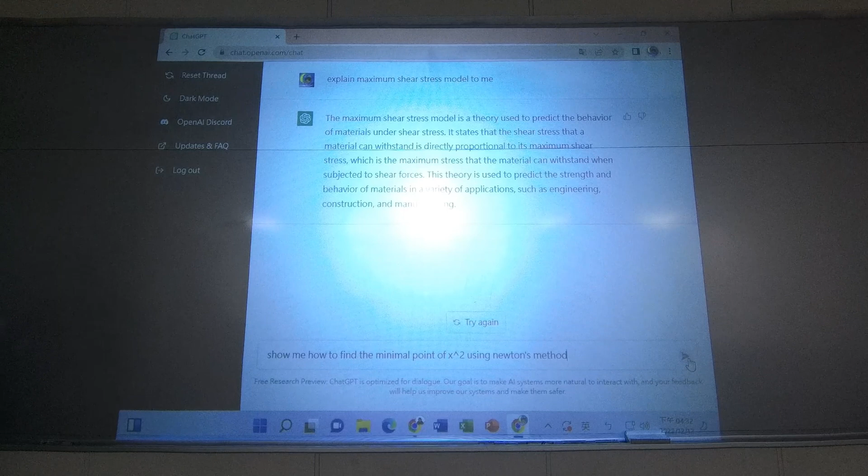You can even ask it to solve a math problem, like finding the minimum point of a function using Newton's method, and it will tell you how to do it. So from now on, you don't need me—you can just ask AI, and it will teach you how.

It's really doing a pretty good job. I'm very surprised by this. But because it's free, the answer can only have a certain length—there's a limitation. So when the AI finds a longer solution, if it's over the limit, it will stop at some point. But you can ask the system the same question multiple times, and it will search the internet for answers again, giving you a different answer.

So it's quite powerful. This time it's showing me an example—last time I tried, it didn't show an example. Okay, remember last time we had, in gear design, a model called the Lewis factor. Let's see if AI knows it.

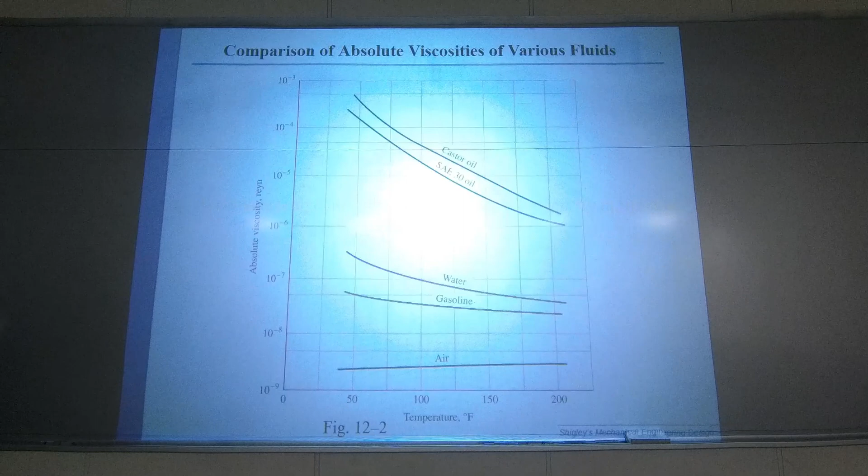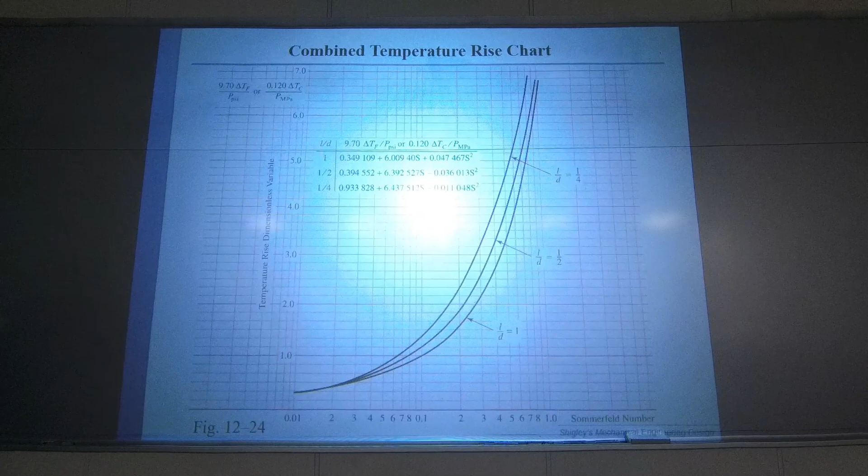So inside the bearing, for example, if we have a ball bearing, we have small metal balls inside. Let me show you a picture. This one—not this chapter. But this is journal bearing. Okay, next chapter.

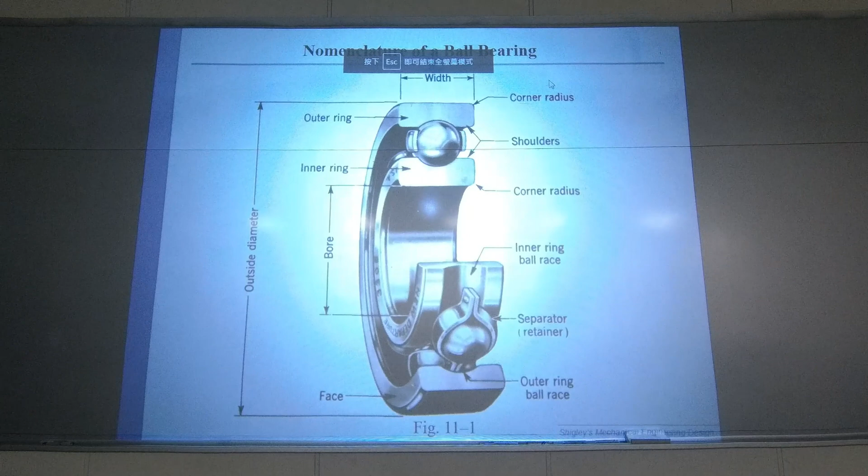So this is gear. Okay, let me check. Okay, rolling contact bearings—okay, here. So a bearing has those metal balls inside, sorry, and we have inner rings and outer rings.

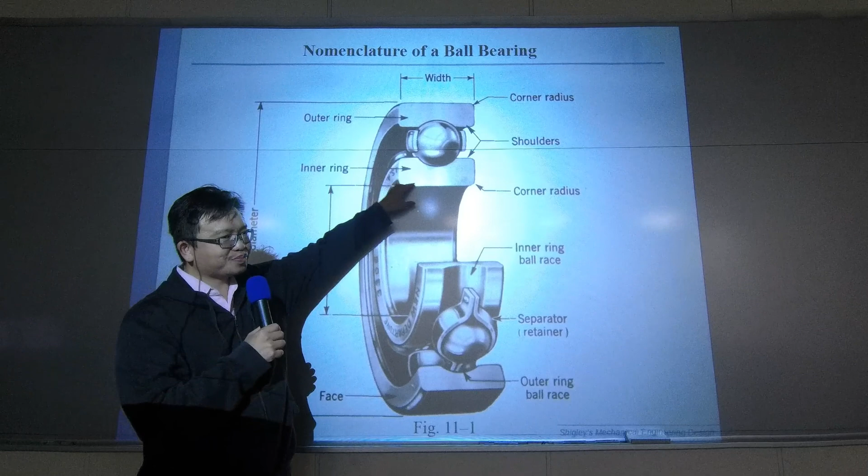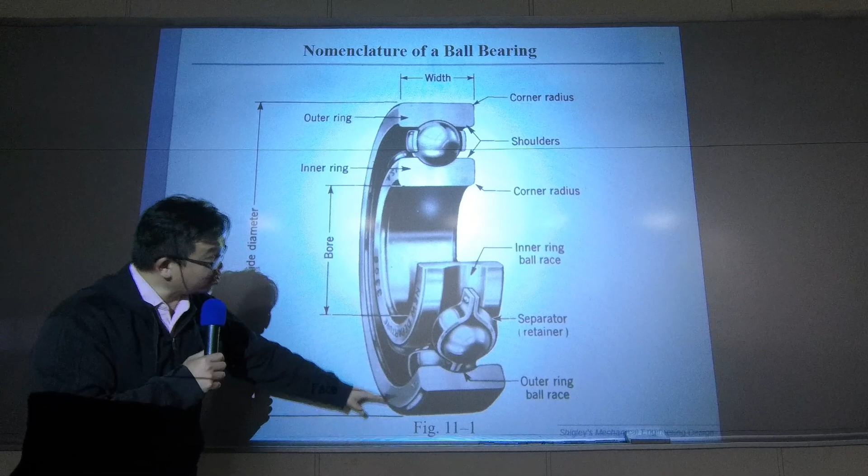And some other terminology you need—the inner diameter is called the bore. The inner hole is called the bore, and the outer diameter is still the outer diameter. Ball bearings can be made in many different types, but we cannot spend too much time on this.

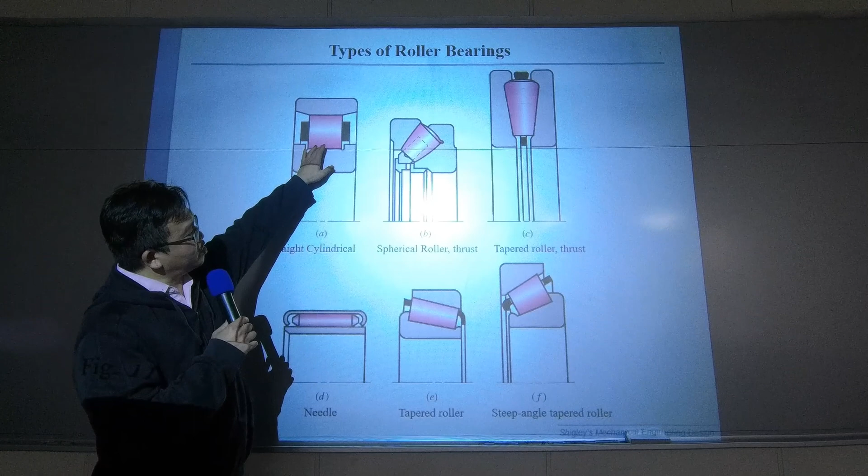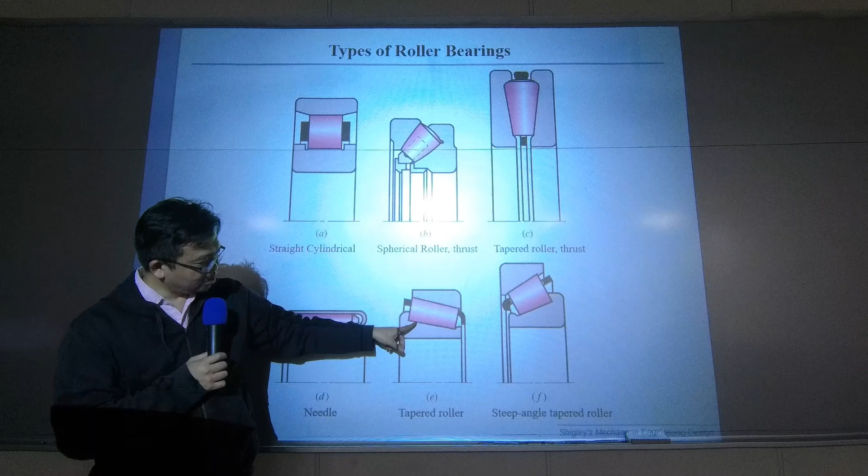We also have roller bearings—they are like cylinders, this is a cylinder right here. And we could have cone-shaped rollers. When you see this one, it's actually a cone, 圆锥—a cone, not a cylinder. It could be having some angle.

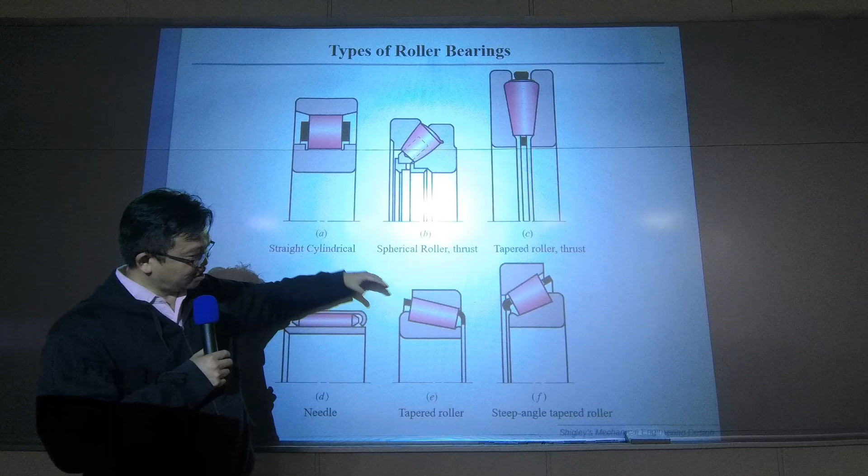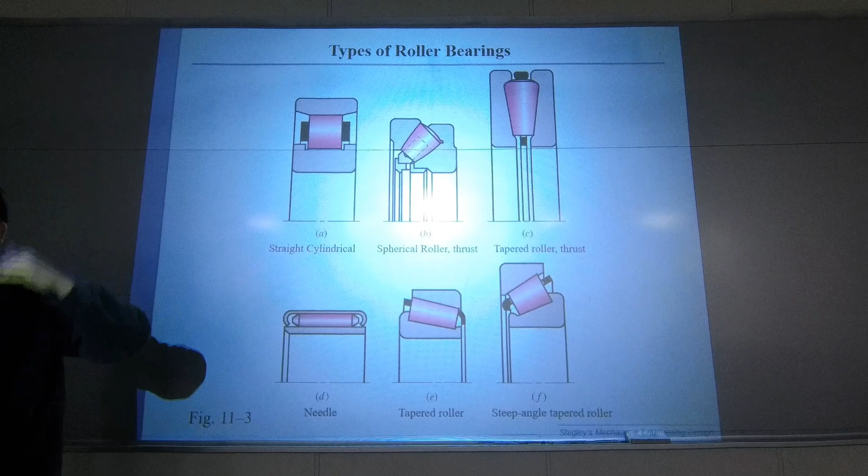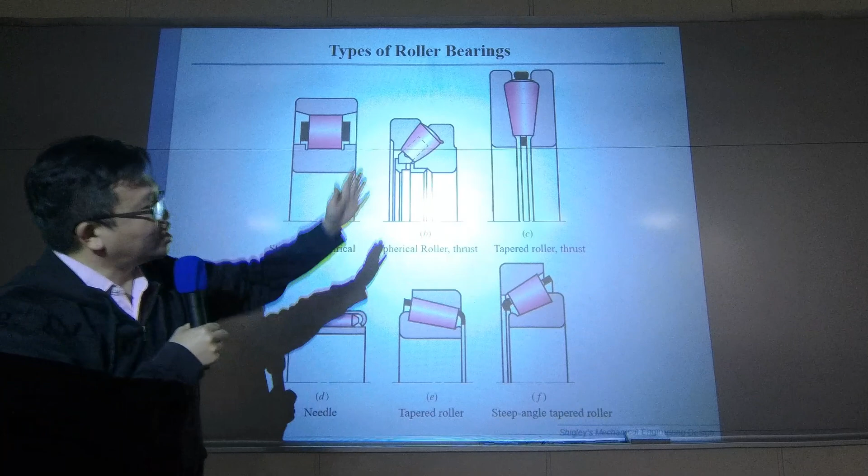When you have a roller with an angle like this, that's because you want this bearing to be able to carry loads from different directions. And we even have this—also a cone shape—lying on the circular surface of the bearing.

And this is more like multiple straight thin rods formed into a circle—you have many of those, and that's why they used the name needles. They're like thinner cylinders, multiple of them.

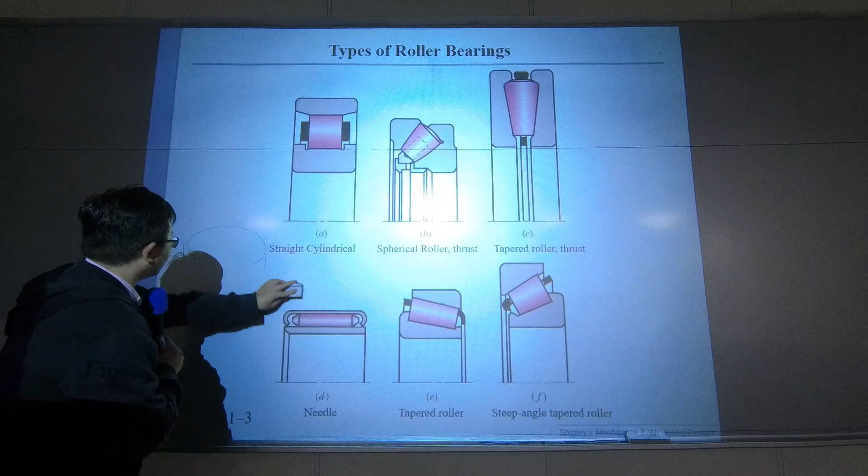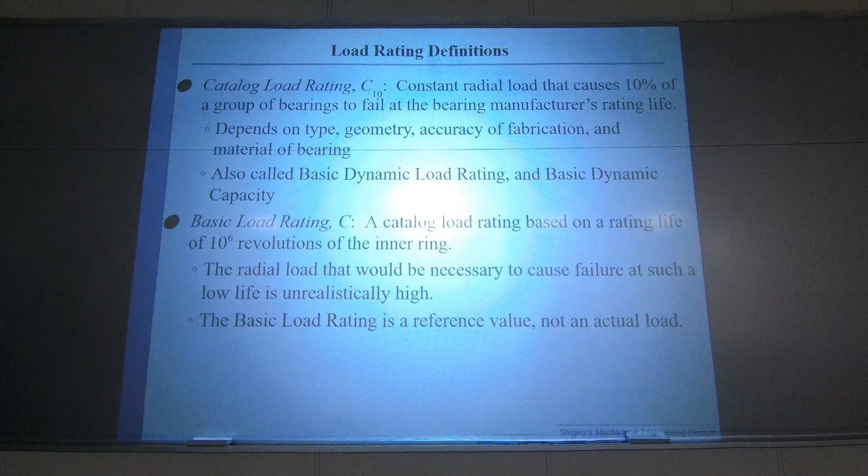So there could be many kinds of bearings with different geometries inside, and it's rolling. So when you design a gear, the force distribution inside the bearing is so complicated—there is no exact force analysis to predict or estimate what the force inside is.

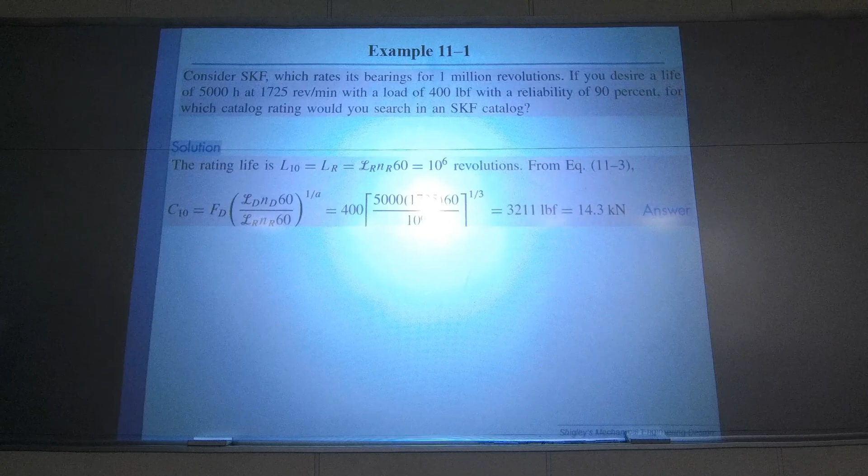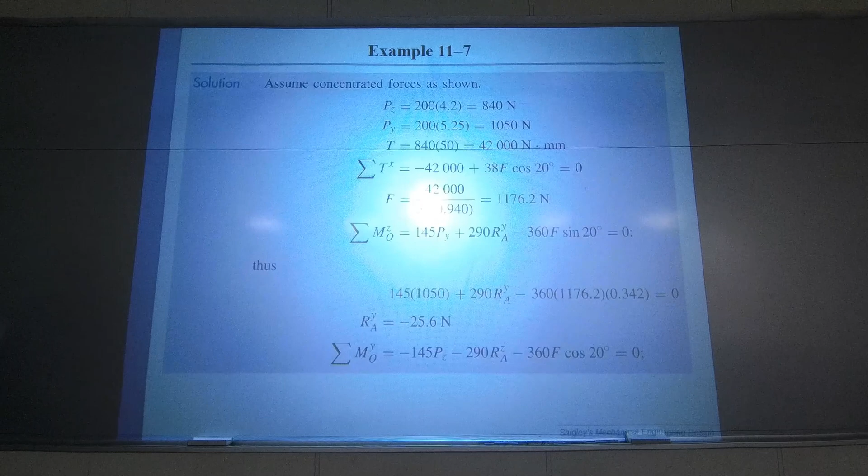I can show you—let me see if this PowerPoint has it. Just very quickly finding what I'm looking for. Okay, in the other one, just quickly to explain some very important ideas of bearing design and why we design bearings in such an approach. This one should have it. Let me see. Okay, maybe I'll find a picture from the internet.

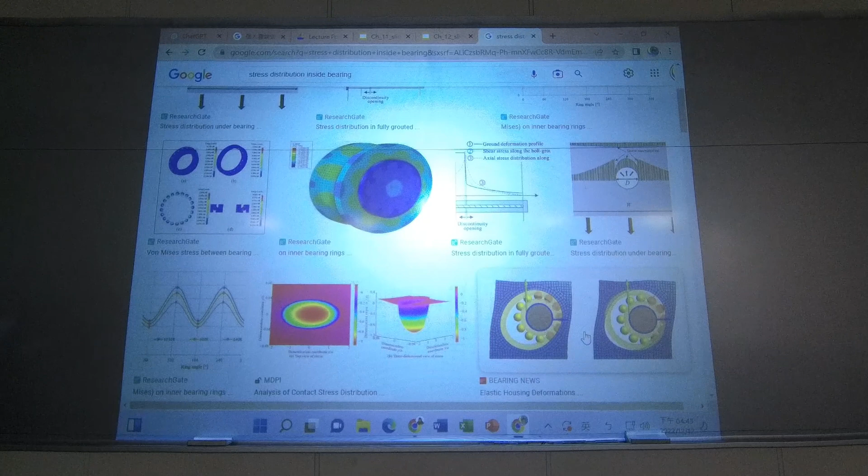The stress distribution inside a bearing is very complicated. This is already a model, and a model is not the exact shape. This is someone trying to analyze it by finite element methods, like this one. The deformation is kind of exaggerated, but you can already see how complex the stress could be distributed inside a bearing. Let me see if there's some more supporting information I can show you.

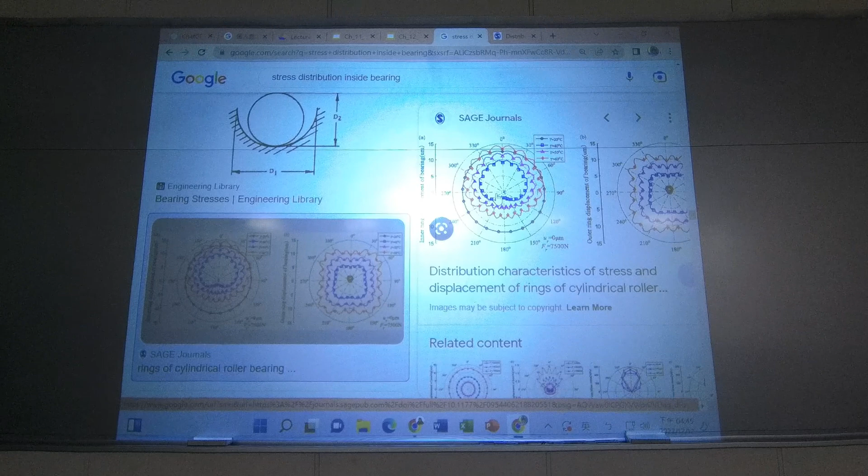This is a diagram showing the stress distribution inside a bearing at different angles, and you can see those curves. If it's having a wider radius, it's larger. If it's smaller, it's lower. Actually, the last picture was much clearer. So from here you can tell the stress inside the bearing around the entire geometry is so nonlinear.

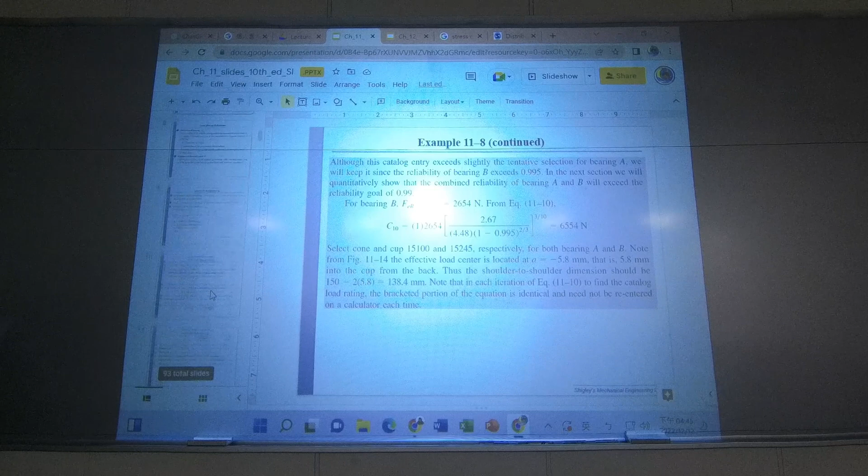So what can we do to properly have bearing design? The strategy is we don't try to find a way to analyze the stress directly. We rely on statistics.

Researchers have done a lot of research experiments and figured out there's a relationship between two important things, F and L. F is the load being applied to the bearing, L is life. They found F and L have a relationship. If you want a longer life for your bearing, you cannot carry a larger load. If you want to carry a larger load, then the life of the bearing will be shorter.

From common sense it sounds really simple, but they found this exact equation through experiments and realized this truly could be considered the design equation. This A parameter could change for different kinds of bearings. In this textbook example, for ball bearings, the power is 3, for this one it's 10/3. How come it's 10/3? Because in their experiments they found this parameter is the best fit.

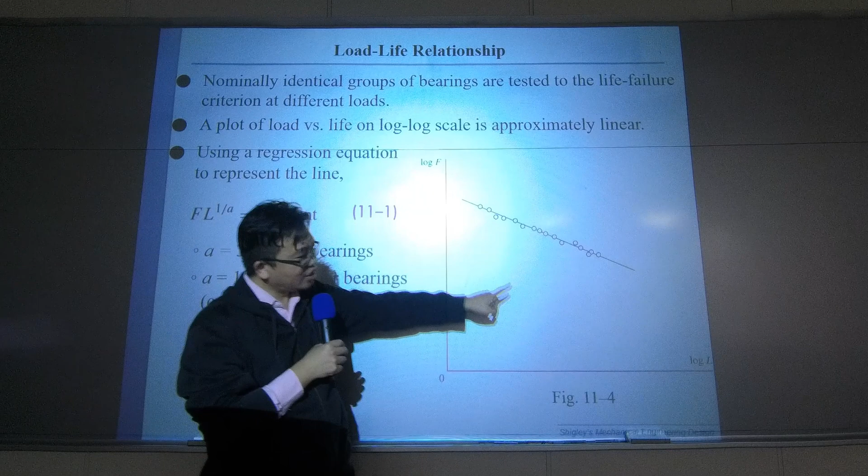For statistics, it's all about fitting the coefficients. There's no exact stress analysis or force analysis for bearings. They just observe the behavior between force and life, and from experiments they found that if you take a logarithm of force and a logarithm of life, the experiment data looks like a line. So probably they used linear regression to get this line, and this is their result.

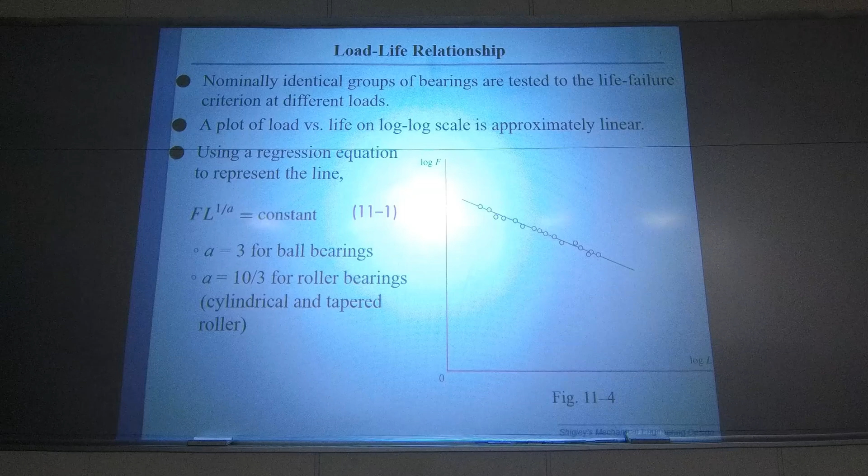With this, it's very useful because they found F times L to the power of 1/A is a constant. So that means if I have condition 1, it must equal condition 2.

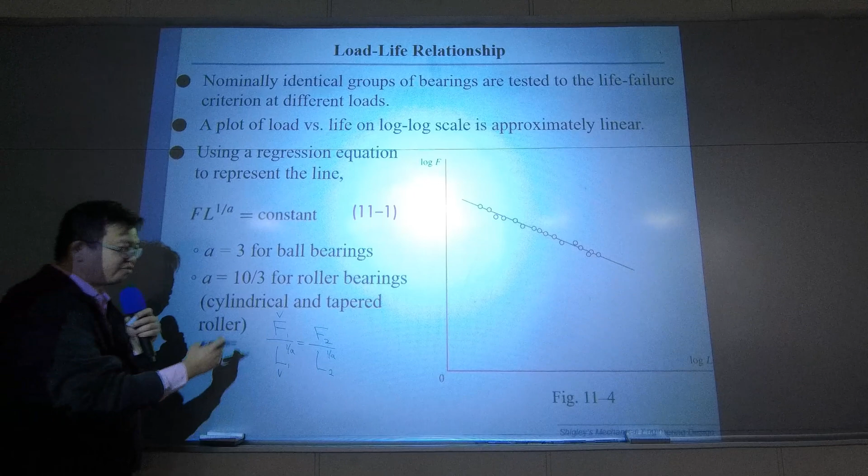Sometimes if you have experiments for some condition, but you want to check how this bearing will behave in a different condition, here's what you can do. Let's say you know these two parameters because you purchased the bearing, but you don't know how it will behave under a different load. Then use this equation, and you can calculate and estimate what the life for that bearing would be. This is how you can use an equation like this.

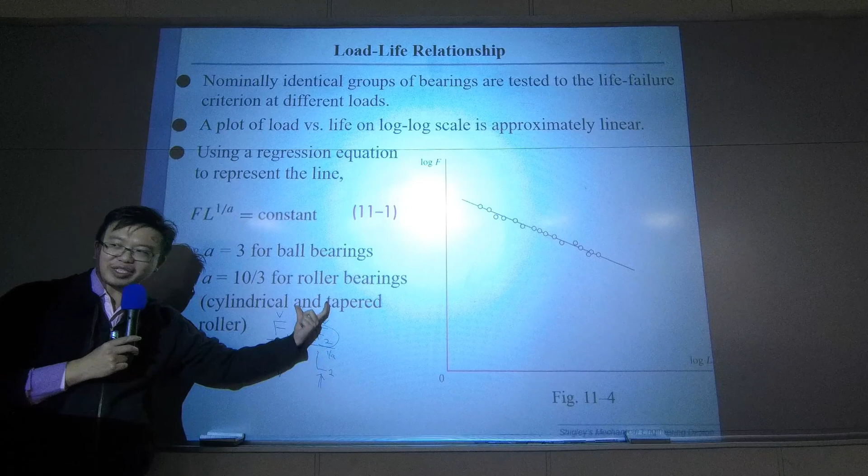Maybe this particular data isn't provided, but they tell you this so you can plug into the equation to estimate the behavior. This is exactly what I'm talking about.

Based on this, there's a very important terminology called C10. What is C10? C is like a rating, the catalog load rating, like a score, and C comes from this catalog. What is 10? 10 represents a failure rate of 10%, or you can say reliability of 90%.

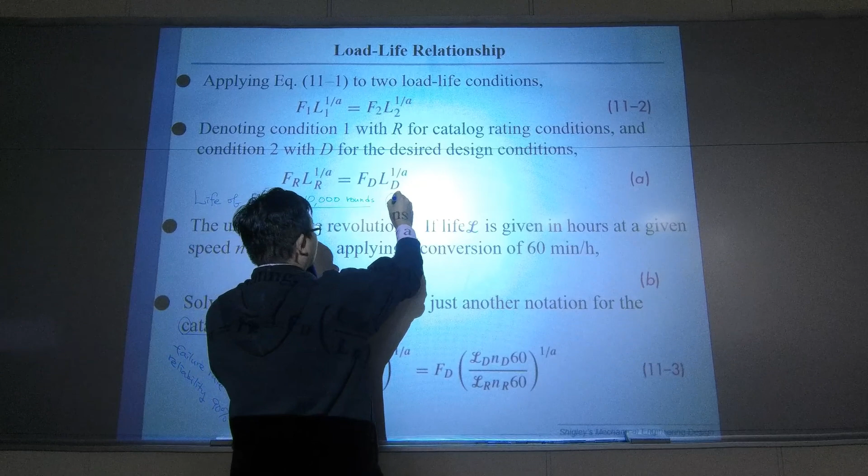What does reliability of 90% mean? That means if you have 100 exactly same bearings, after they finish a lot of work until the end of their life, 10% fail. That's reliability. For example, you estimate the life of this kind of bearing equals 10,000 rounds, under some load F. So if I have a bearing under some load F and it rotates 10,000 rounds, by the equation I mentioned, maybe this tells you the bearing will be dead at 10,000 rounds. But in fact, that number doesn't mean all the bearings die at the same time. They don't suddenly die when moving on to round 10,001. It just indicates that when all those bearings reach 10,000 rounds, around 10% of them will fail.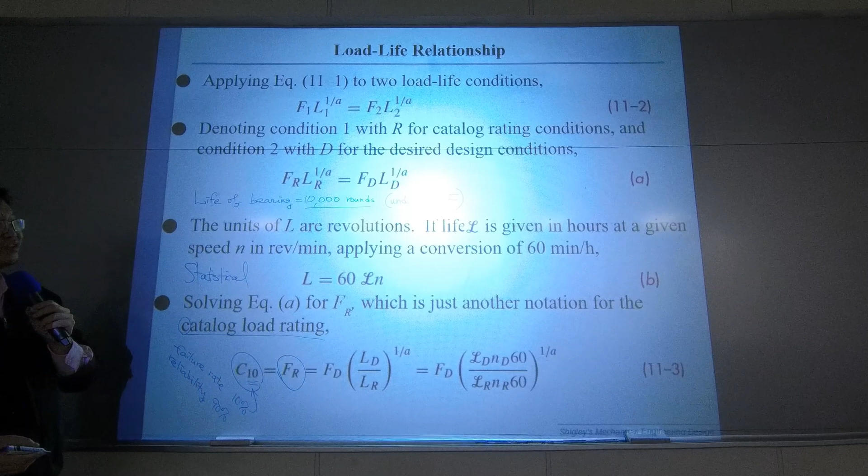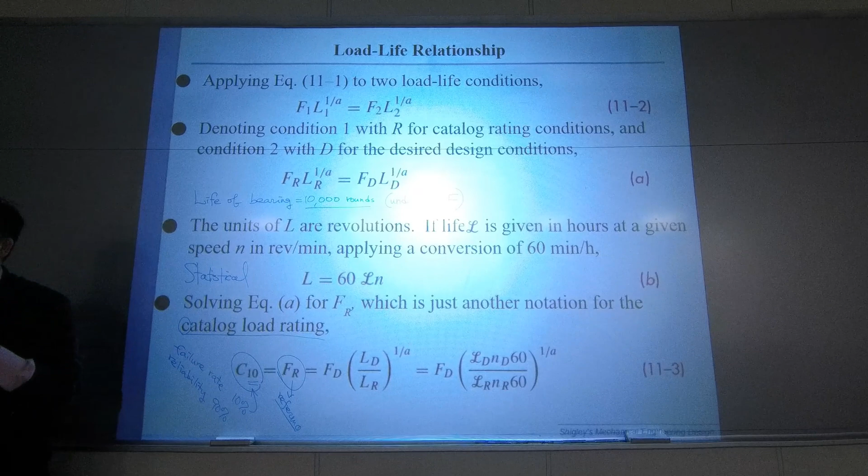And what is FR? R should be reference, I believe. I think they use reference for FR. So basically from the catalog, it's telling you C10 is a reference load.

And in order to determine, over here D is your design. That's what this equation is about. This is determined from what we had earlier, then this is from the catalog. The catalog only tells you C10, basically 90% reliability. What would be the force? But it only gives you one number.

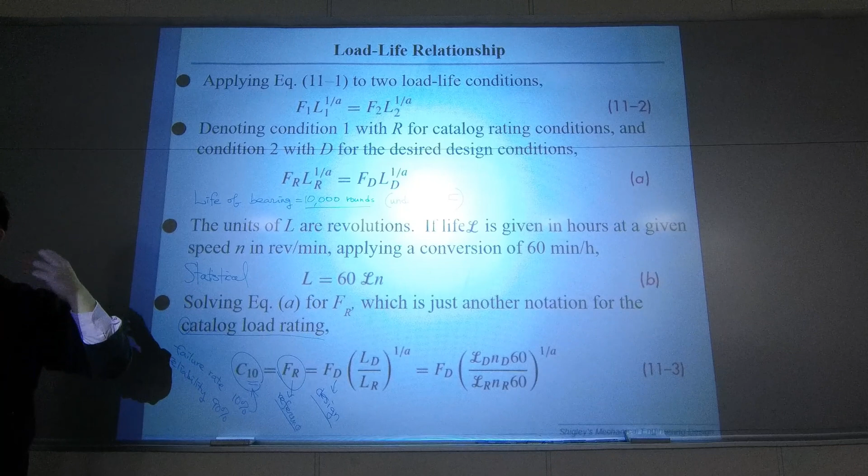What if you are not going to apply the same load? You are applying a different load, so in your design you have a different F. You can plug in that different F, and the catalog will tell you the reference life. So you have C10, the book tells you its life in the catalog, and then you put in the load you expect to apply, and then you can calculate life. That's basically the idea. Very simple, and I hope it's easy for you to understand.

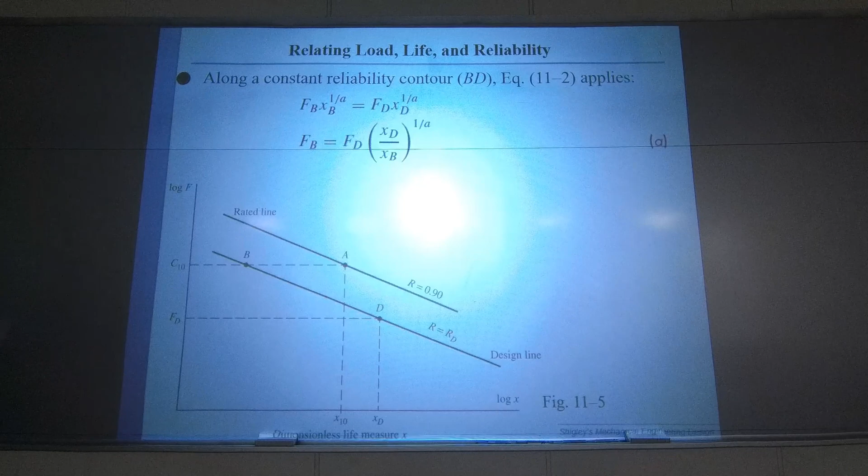Let's check more about this kind of calculation. Let's see if this is showing a table. I would like to show you a table. So this is what you can find in a catalog for bearing.

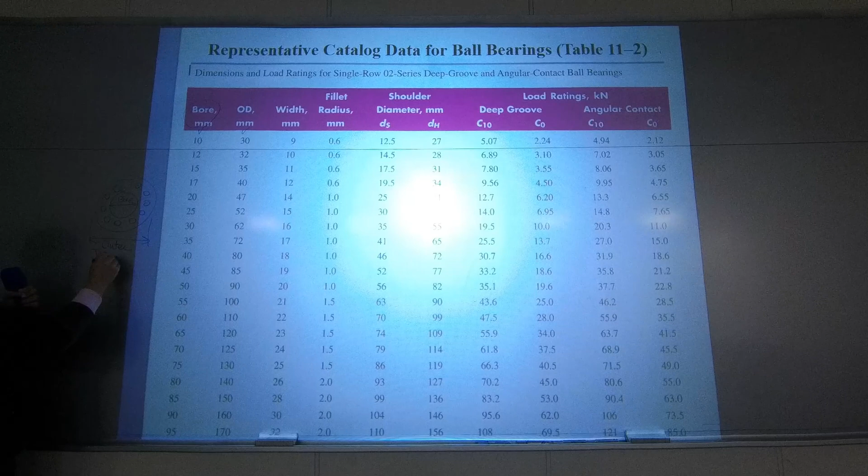So usually in your design, you will pick up the dimension, right? This is what you usually do. You decide the cylinder, the shaft at the center, is going to have the same size as the bore. If this is your bearing, this is called the bore, and this is called the outer diameter, OD.

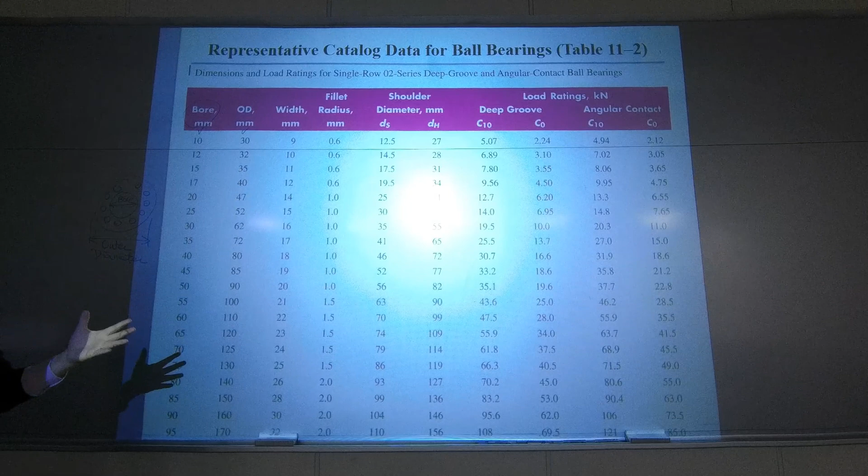Okay, so usually in your design you define the dimension. But once you define the dimension, you already select which kind of bearing you are choosing, because in this catalog they only have specific dimensions. If you pick up this one, the bore has to be 12, the OD has to be 32. So you can only choose from the catalog, you cannot just design any dimension you want.

So let's continue to study more. If you already pick up one, for example this one, this is the bearing you are choosing. See how it's giving you the C10. There are two C10s. Here it's telling you this is deep groove and angular contact. So basically there are two different kinds of geometry, and it allows different kinds of contact.

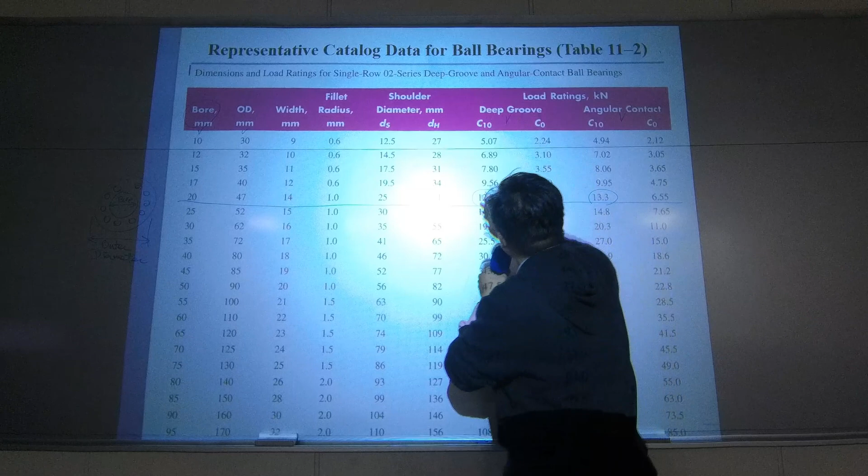So let's just focus on one kind. So C10. Usually a book like this will tell you what's L, and usually L is probably 10 to the 6 rounds. So it's indicating, if I'm right, for the bearing to rotate under load for 1 million rounds, the maximum load this bearing can carry is 12.7.

I don't know the unit, we need to check more, because this is one slide, it doesn't provide every information, but there's a unit for this 12.7. How about C0? C0, I believe it means like a reliability of 99.9, a lot of nines, so it's almost 100% reliability. So C0 is like, if you apply a much smaller load, the life could be much, much longer, for exactly the same bearing.

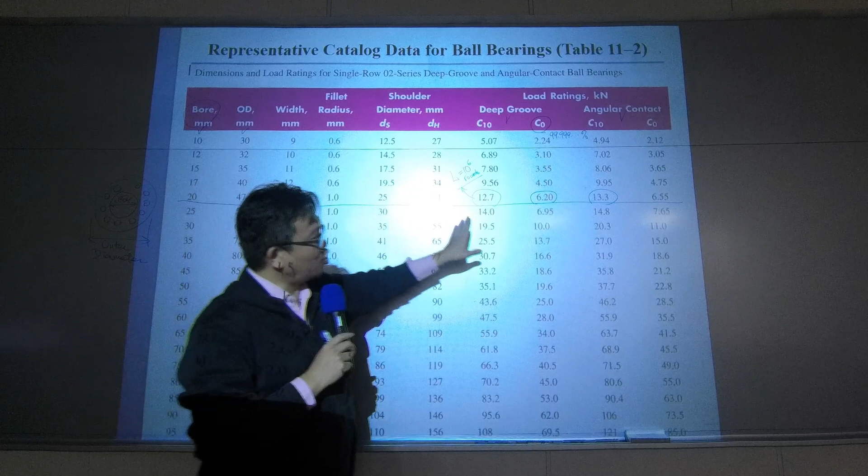And the other parameters are just talking about the geometry. I think the most important thing about a bearing catalog is how much load you are carrying, and you need to estimate, for this particular design, how many rounds do I expect this machine to operate? For example, you are designing for the UAV.

Let me give you one example. So this is a set of propellers on drones, the propelling drones. And over here you see they already prepare the bearings for the propellers.

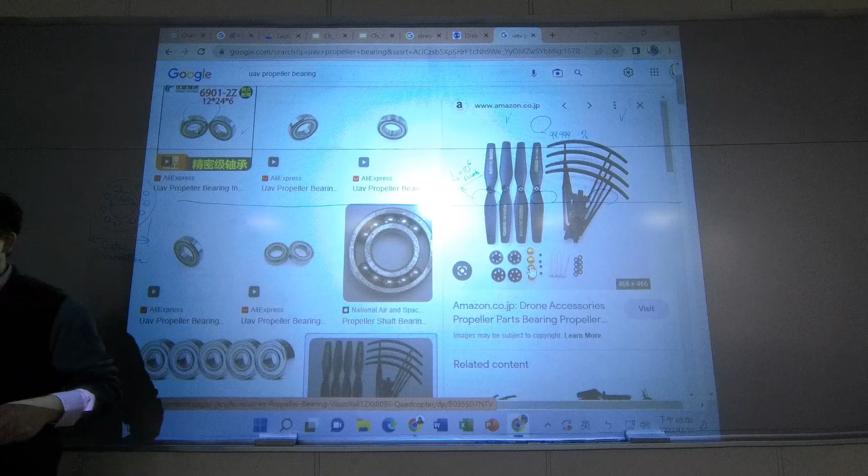And as a mechanical engineer, how are you sure this bearing is okay? Should I get a bigger one or smaller one? So they must have done some engineering, some calculation to determine this is the most appropriate one. If the bearing is larger, it's heavier, heavier means you waste more energy, and maybe it's too strong. If it's smaller, maybe it's too weak.

For UAV design, there's definitely research about how much load will be applied to the bearing. You can do some analysis about the UAV and estimate what's the usual average force applied to the bearing. Use that force when you're designing it, and you need to make some estimation about how much life you wish this UAV to survive.

As a UAV designer, you need to know, when it's flying, what would be the rotational speed, how many rounds, and for every mission how long you're flying, so you have a flight time. For example, it's flying for 20 minutes at an average propeller speed, then you can calculate for every mission how many rounds this bearing has been rotating. So for every mission, say 1,000 rounds, then how many missions do you wish this UAV to operate? 100 missions or 500 missions? That's how you can estimate life for a component like this.

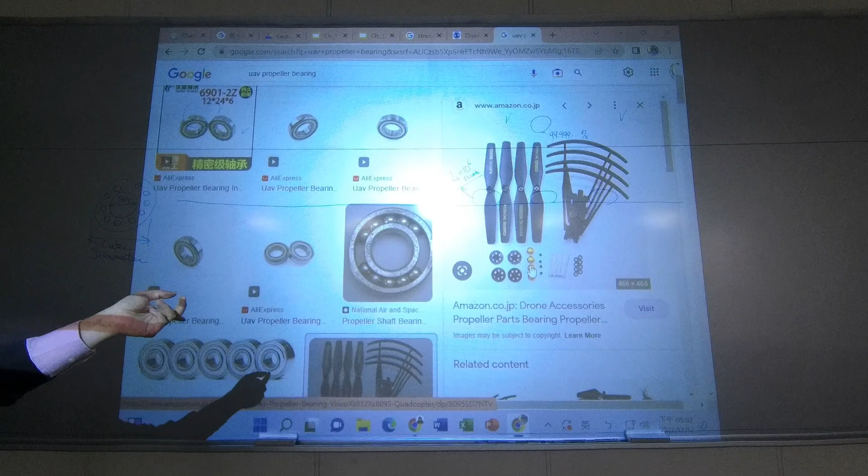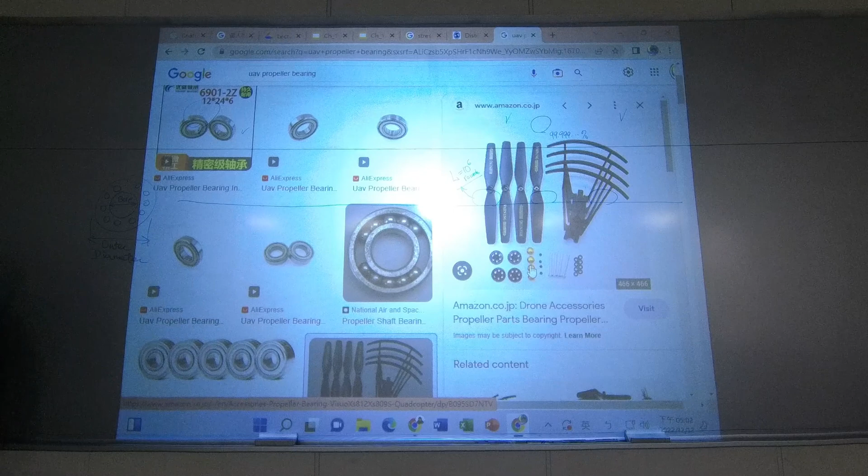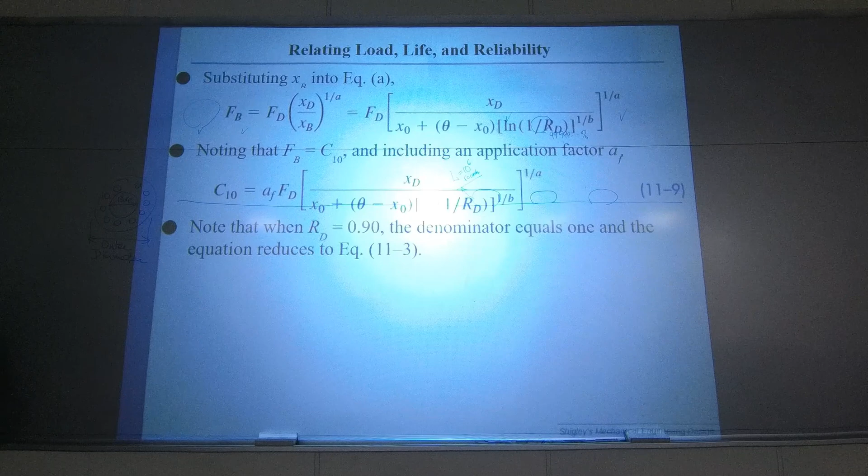Once you know the force and the expected life, you go back to bearing selection, like this one. The catalog only gives you the standard measured force, which is definitely not the force you're looking for. Then you can plug into the equation we saw earlier. From the catalog you have this, and usually the book tells you the reference life, maybe 1 million rounds. From your UAV design needs, you know this is the force I need to carry, and from the mission request, you know I probably need the UAV to survive for 5,000 rounds, something like that. So when you plug in, you can realize how your design is doing.

The good thing about this kind of analysis is it tells you the reliability. If you follow the equation and the catalog, you can expect that if I have 10 UAVs, maybe one UAV will die when the expected life is reached. So probably when you reach 90% of its life, you can replace the bearings, avoiding possible failure, especially if the mission is very important.

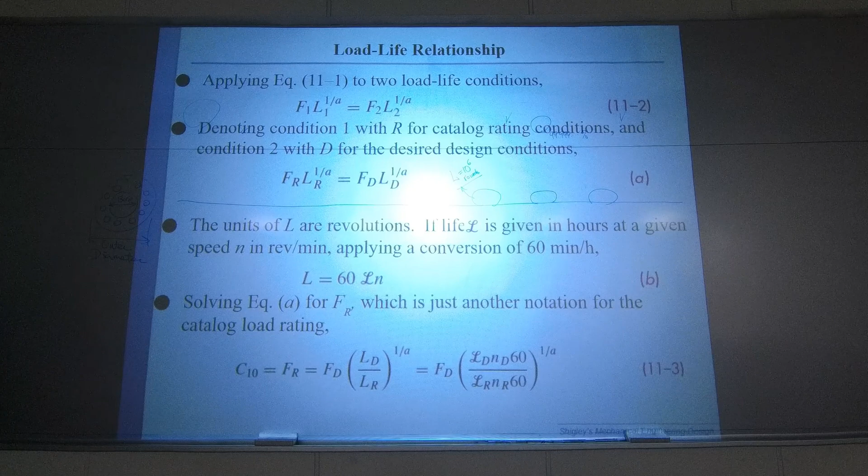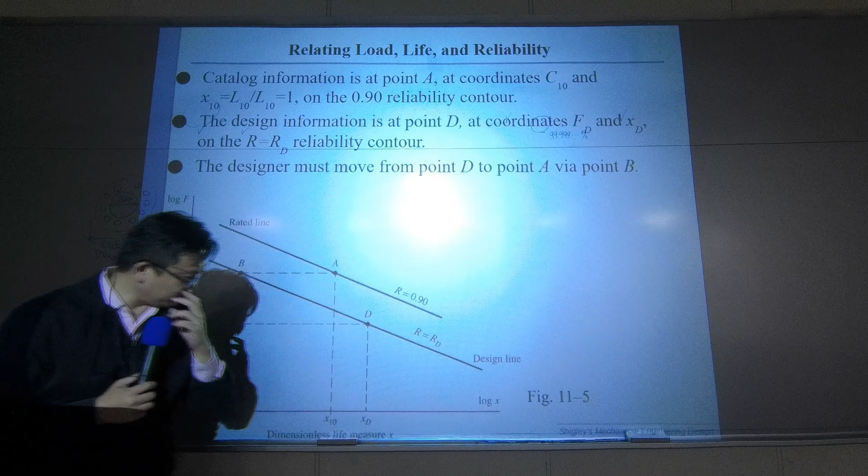So if you plot out the linear function I just showed you, it actually looks like a straight line in this diagram. This is logarithm of force versus logarithm of life, X is also life. What's happening is the catalog tells you C10, and X10 is basically L10 or L reference, because this is F reference.

So this point is what the catalog tells you: what is C10, and what's the life for C10. This amount of force, under this amount of force, this bearing can survive for this amount of time with reliability of 90%. If you want a greater force, like over here, you have shorter life. If you want longer life, like here, you can only carry lower force. This line is exactly the statistical equation we showed earlier.

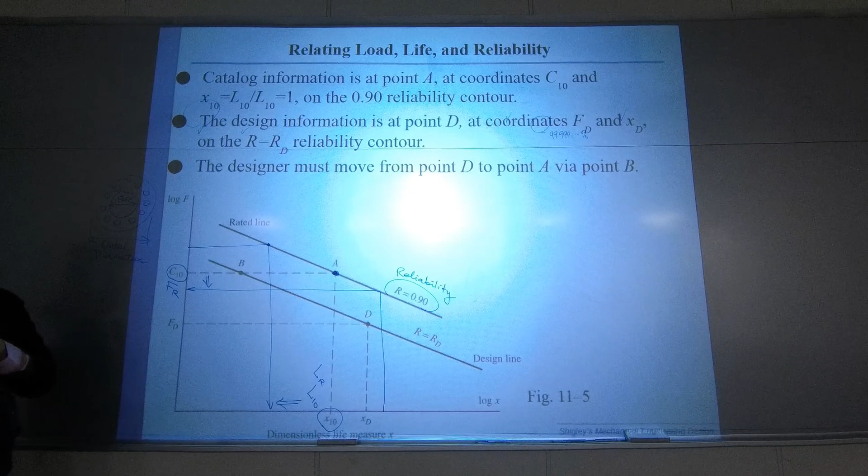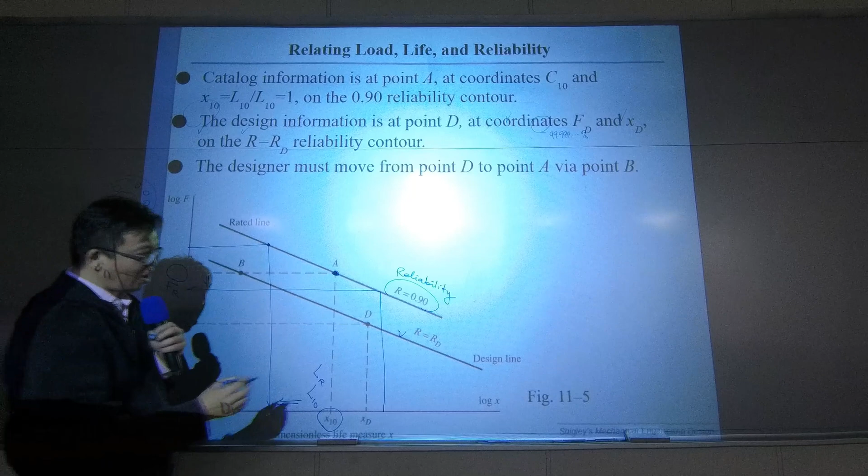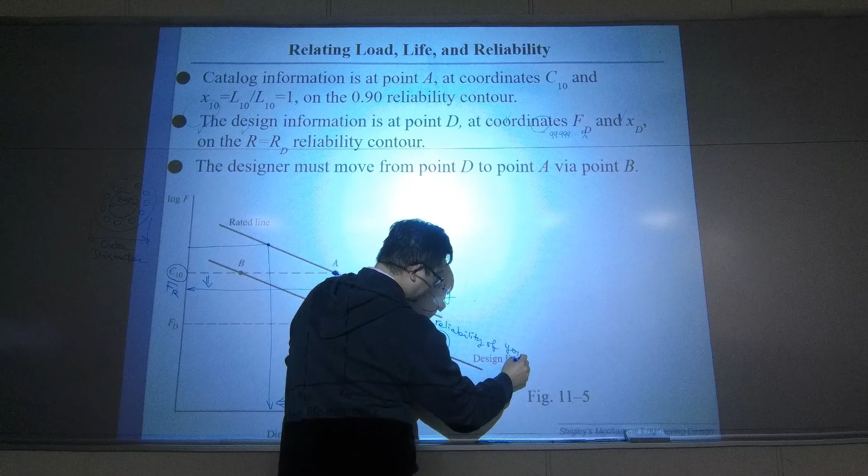How about if I wish to design with a different reliability? What's happening is you can have different lines, and the parallel lines represent different reliability. RD is the reliability of your design. So usually, if this line is going down, coming lower, do you think it's having a greater reliability or lower reliability? What do you think? Let's talk about a point right here.

If I have a lower line, this is from the catalog, basically I'm looking for a design right here. Same force, but with this new line, I actually have a much shorter life. That must mean when this bearing reaches this amount of life, it's still having greater reliability. So you can say this line represents reliability of maybe 95%.

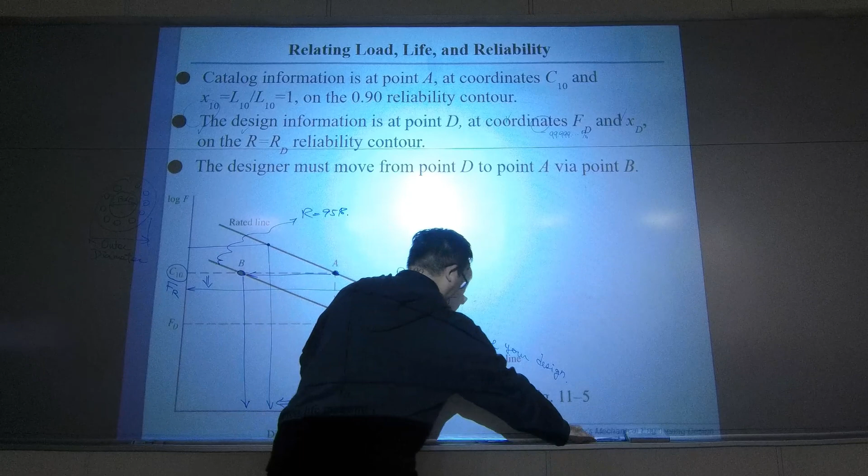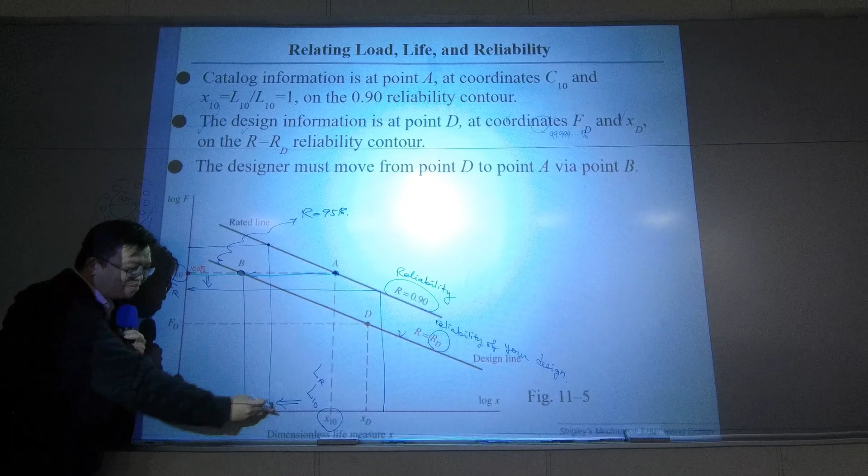If you only study this line, at the beginning this is a brand new bearing, zero rotation. So right here I have 100% of life, 100% reliability—we can only say reliability because time is life. In this description, time is life. So now I'm 100% reliable, no failure. As you begin to operate, the operation time increases, with a lot of rotations for the bearing, there's a chance the reliability drops.

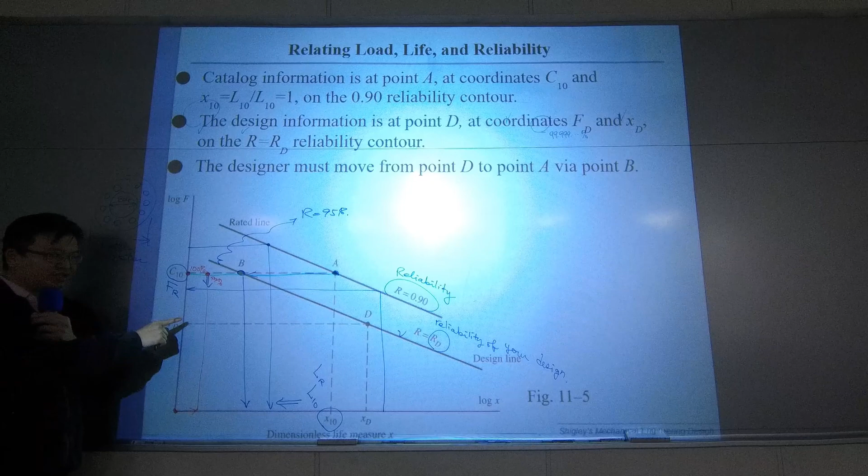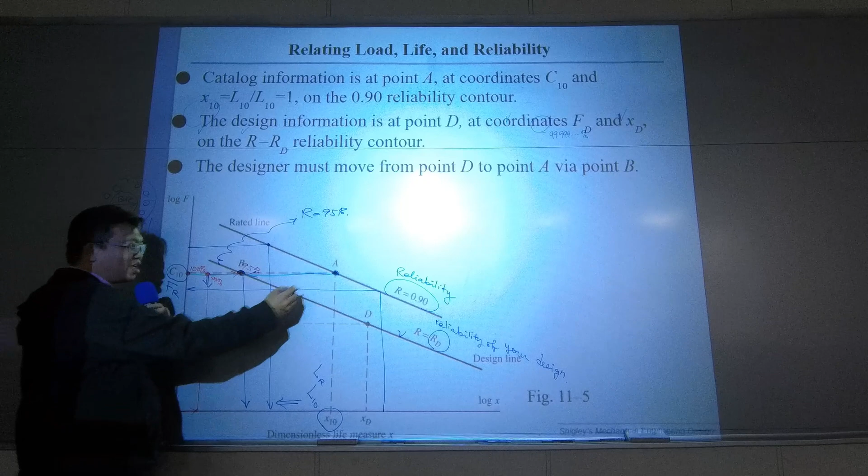Maybe when you reach this point, reliability is already 99%—that means if you have 100 same bearings, one may fail. Down to here, maybe 5% of bearings may fail. And down to here, maybe 10% of bearings may fail. Does that make sense? So it really depends on how reliable you want your bearing to be.

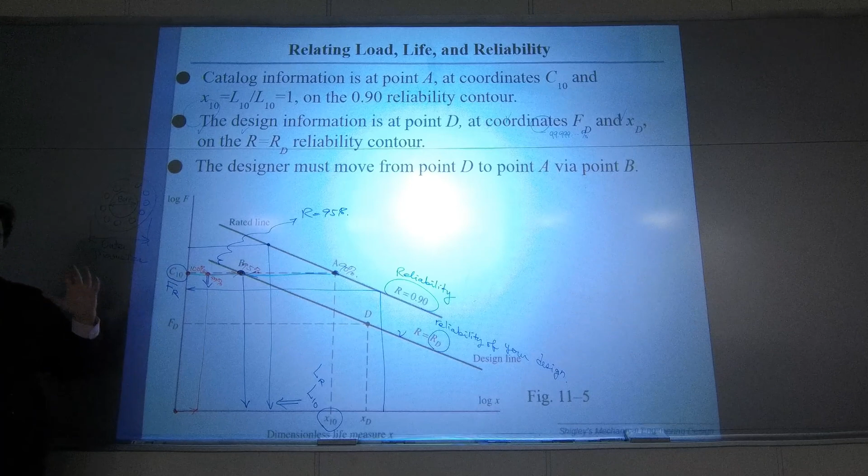That really decides which line you are focusing on. In the catalog, it only gives you C10, only the reference life, only this point—it doesn't give you anything else. So as an engineer, if you have no idea about this knowledge, how can you design a bearing with different load, different amount of life, different reliability? You need to truly understand what's going on, then you can make designs beyond just the catalog.

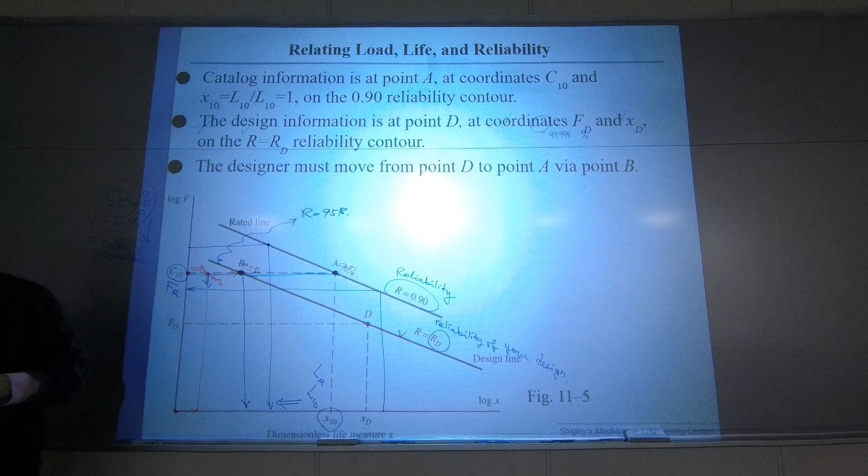Usually what happens is, if you don't know about mechanical design, you just choose a bearing without estimating life. That's what regular engineers usually do.

They just focus on geometry. Okay, this shape is fine, because usually when they design, they already know the diameter of the shaft. And they just pick up, my shaft is 30 millimeter in diameter. Okay, so this must be the bearing to use.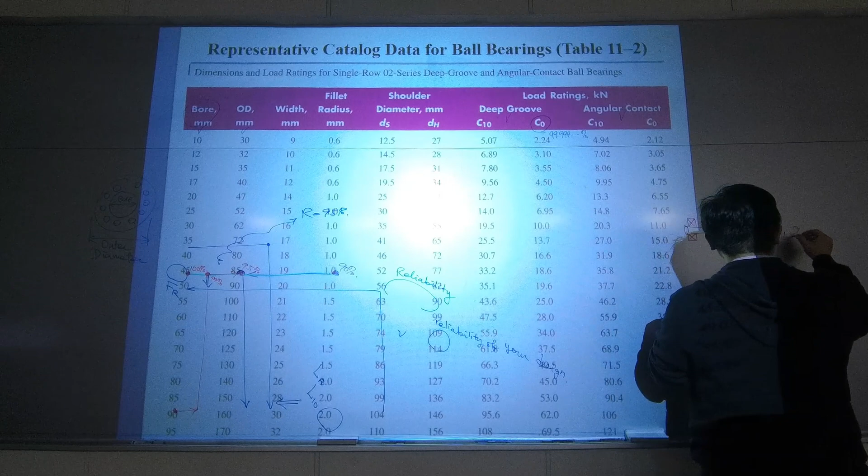This is what usually happens. But a good engineer should precisely and properly estimate life, because in your first several lectures, we already know the bearing is important. Bearings are so important, that's where you have reaction forces. And when you design a shaft, do you remember? We always have bearings, and we always study, okay, there could be reaction forces.

For example, there's an external load like this, and when we study the shear force diagram, it's going to be like this, right? So this is where you have shear forces, and location. And in some cases, if you have another bearing here, for example, if you have something like this, and if you have some loads right here, so usually you could be having a design like this, right? So over here, that's where you have a huge change of shearing force.

And if you take the integral, then you have moment. So usually in this case, you may have moments like this, something like that. It could be wrong because I may miss some of the forces. But anyway, bearings carry loads, so in so many cases, failure occurs on bearings.

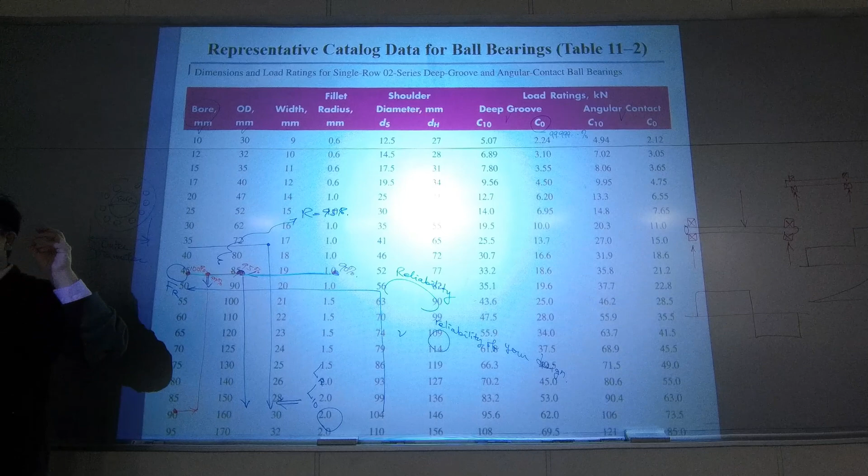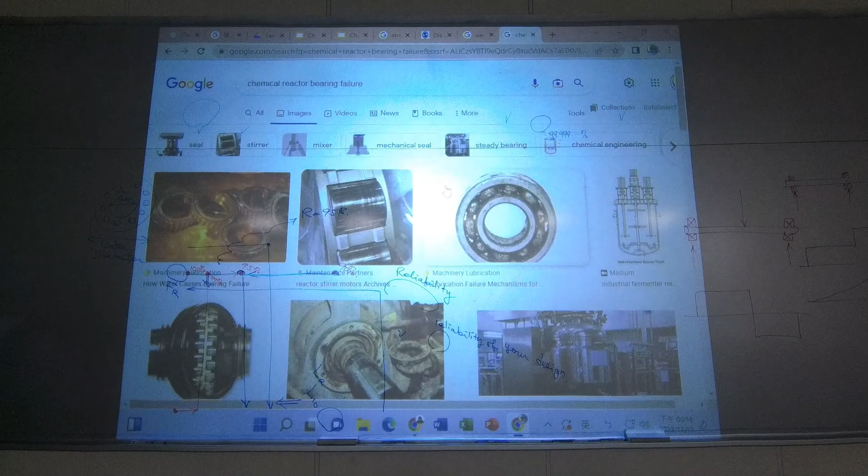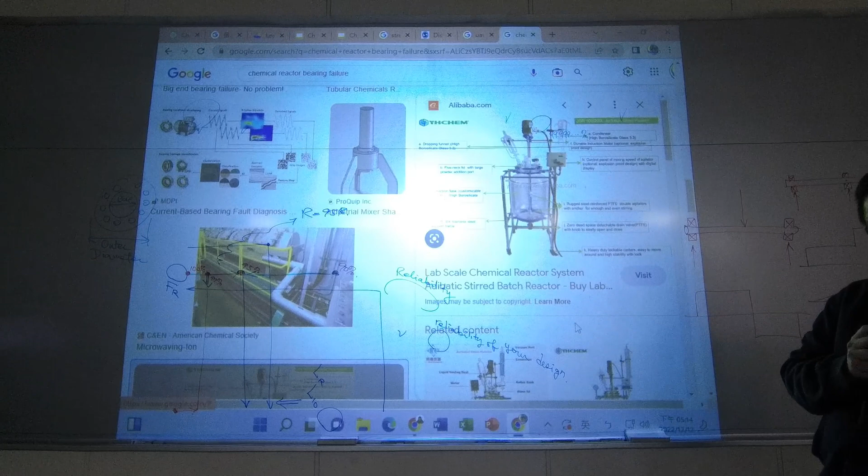I can show you one particular example that we are working on right now. Let me see if we can find pictures. Okay, maybe something like this. Okay, so this is a chemical reactor. At the center there's a shaft, and it's spinning, and on top of the shaft there are propellers.

For chemical reaction, you need the propeller, the blade, to mix the chemicals inside. And if it's a high pressure, high speed chemical reactor, this is rotating really fast. Of course, there's a lot of force being applied to the shaft, and of course being applied to the bearings. With a system like this, as mechanical engineers, we can try to place the bearings probably somewhere here and here, right? There's nowhere else you can place bearings.

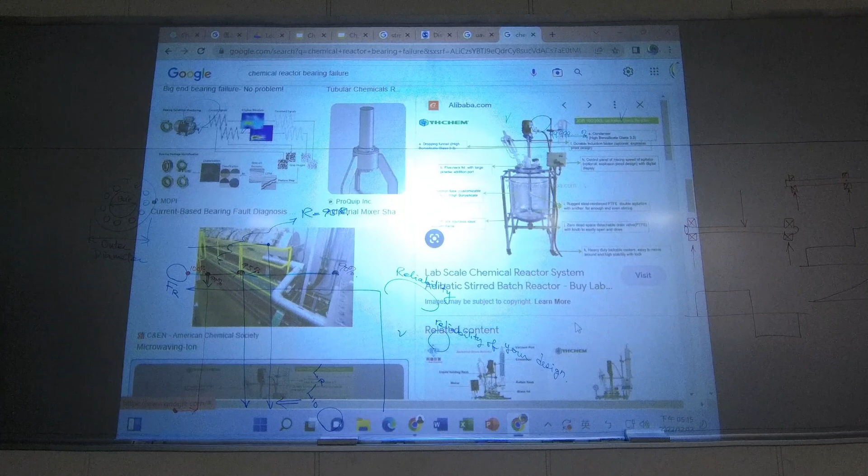Then, can you guess what kind of failure it could be getting? Maybe the ball bearing has wear, and maybe the bearing breaks. Then the shaft cannot move anymore. That's where the failure could happen. So for a system like this, I think the most important component for safety is actually the bearing. If you did not calculate, if you did not estimate the life of bearings properly, you will see failure out of your expectation. Okay? So it's a very important component for design.

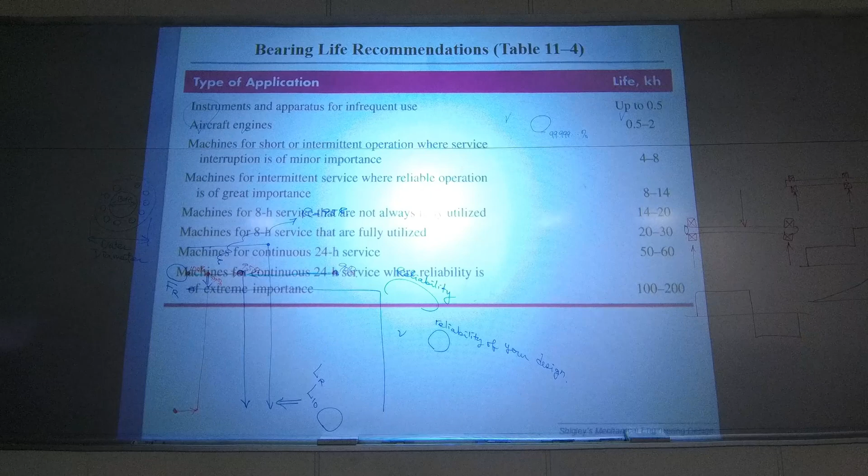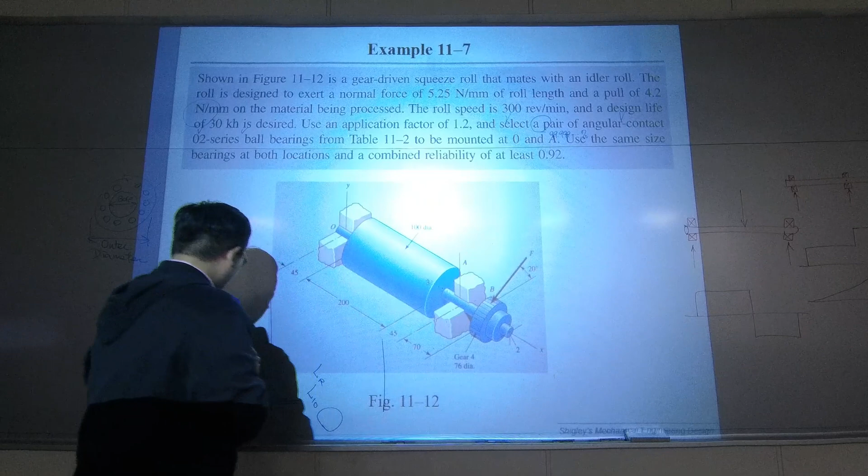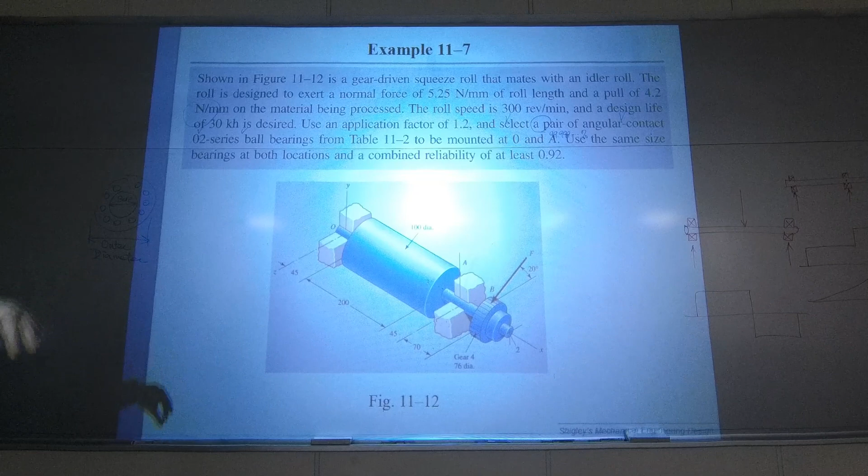Because we have very short time, what's the 2 minutes, 3 minutes, yeah, just a very quick one. Okay, so for this book, if there's a homework for this chapter, usually we solve a problem like this. So we try to link the bearing design with the shaft design that we learned in the past. But luckily, you guys don't need to worry about this. But I just want you to know, for shaft systems, you can place all kinds of mechanical components on the shaft, and usually it's rotating. And always you have a bearing if it's rotating, right?

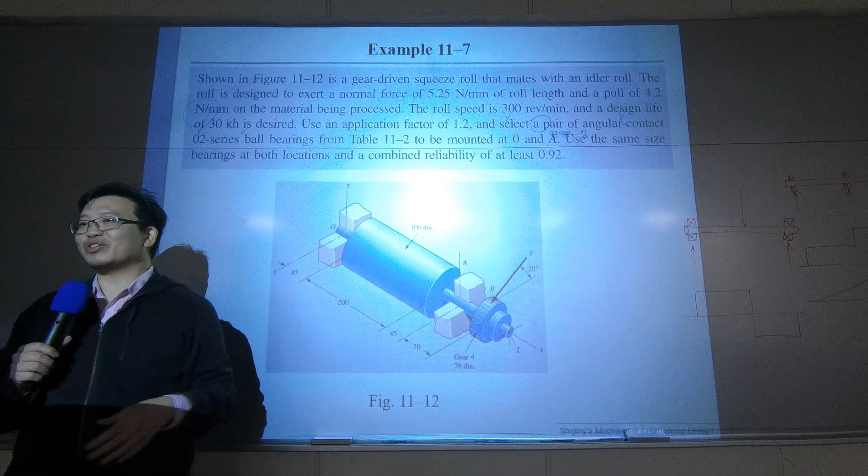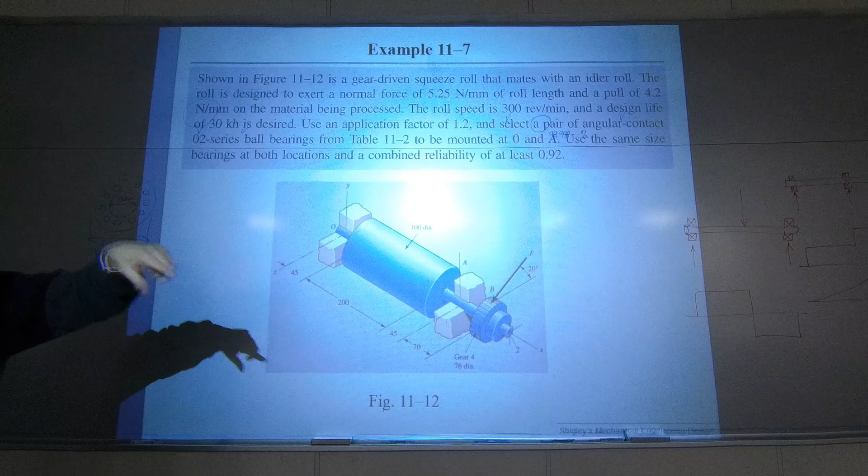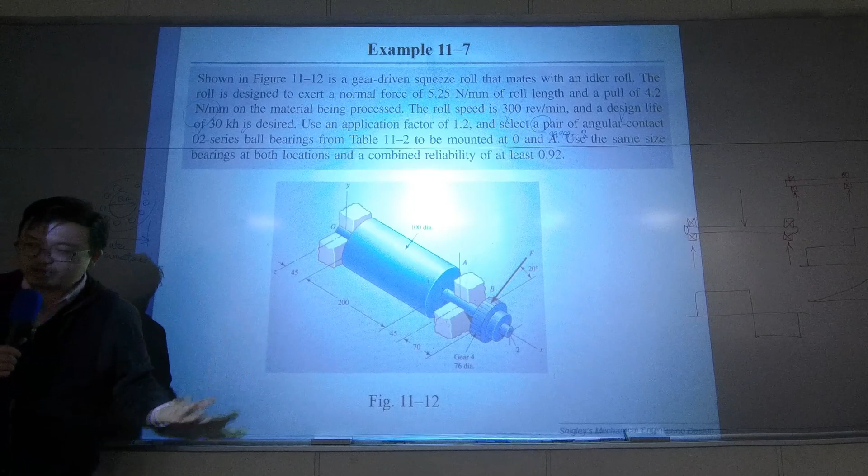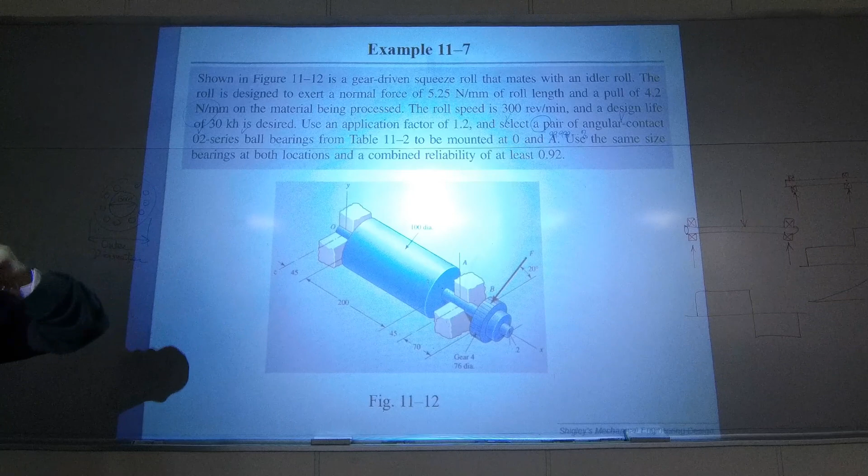So in the chapter for bearing design, what the usual problem is, what's the expected life for the bearing? So it usually comes from force analysis and then life estimation. Or a problem like this could ask you to make a proper design of the bearing based on the table, which bearing could survive some kind of load with certain amount of life. Okay, so in the future, if you have our textbook, or when you look for a catalog or reference information, please don't forget about what I taught you today, or maybe my YouTube video will always be there.

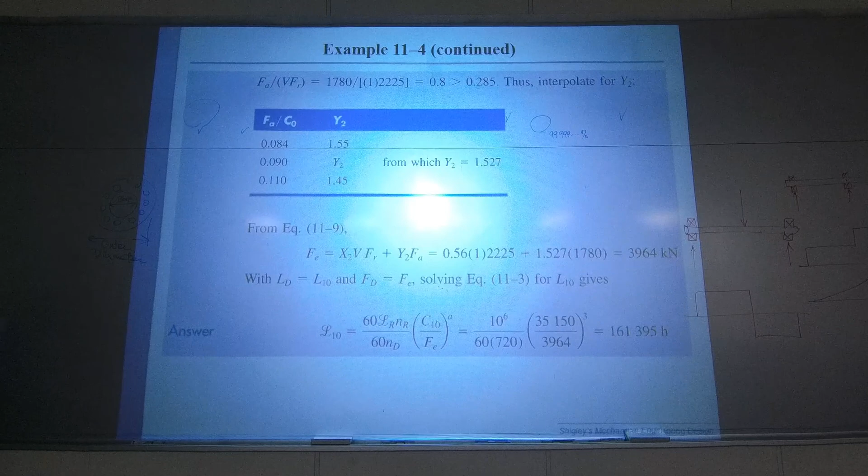You can go back and watch it again. So please remember, C10, what is C10? Because in the catalog, it may not tell you what is C10. C is the catalog, the force. 10 represents 90% reliability. And usually, C10 has a corresponding life based on the data this catalog is providing.

That's the most important thing, I believe, for today. Because in the future, when you pick up a bearing, if you have no idea about C10, you are basically making a guess. Okay? So don't guess. That's what I want to talk about today.